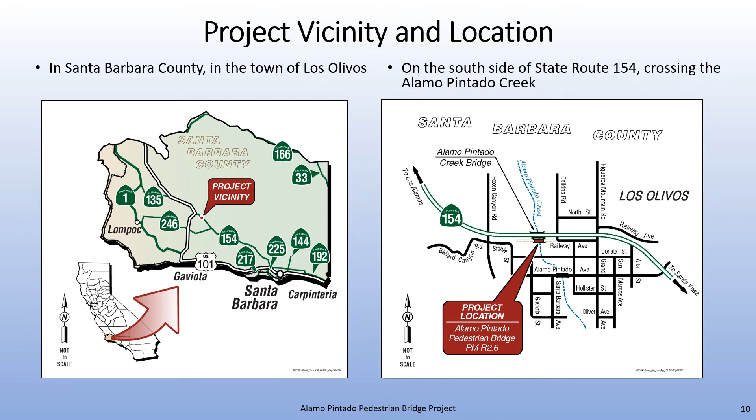The Alamo Pintado Creek Pedestrian Bridge was constructed in 1912. In 1971, a new bridge structure, Alamo Pintado Creek Bridge, was built 40 feet upstream from the original structure. At that time, local citizens contacted the state to leave the 1912 structure in place so it could be used as a pedestrian and equestrian trail bridge. Concrete footing encasements were built around the pile caps of the existing structure.

However, these encasements have eventually become exposed and undermined over time. Scouring of the pile and pier foundation has caused settlement of the bridge deck. A bridge inspection report in 2011 determined the abandoned bridge is no longer stable with respect to gravity load. The bridge is sinking slowly at the supports. In the inspection report, recommendations were made to either retrofit the bridge or remove the bridge.

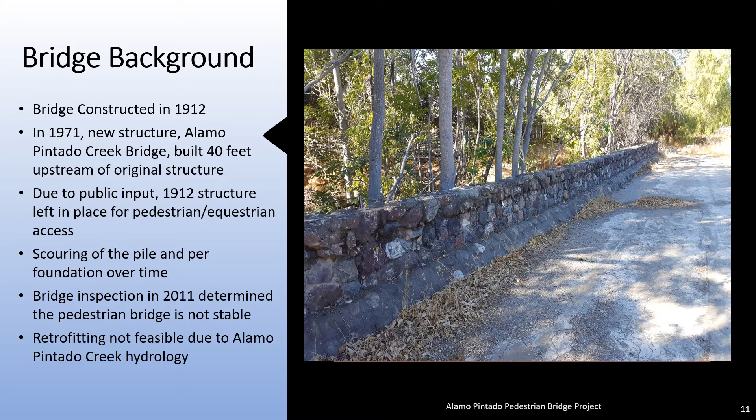Since these recommendations were made, it has been determined that this area of Alamo Pintado Creek is designated as a floodway, and the channel capacity cannot be reduced. Retrofitting is not feasible since the substructure would require constructing foundation elements within the channel, which would affect the hydraulic capacity of the creek. The purpose of this project is to reduce the risk to users from a bridge failure.

The project is needed because there is critical scouring of the pile and pier foundation of the bridge. The bridge structure is no longer stable with respect to gravity loads. Creek channel degradation has resulted in heavily exposed bridge piles, causing the bridge to sink at its supports.

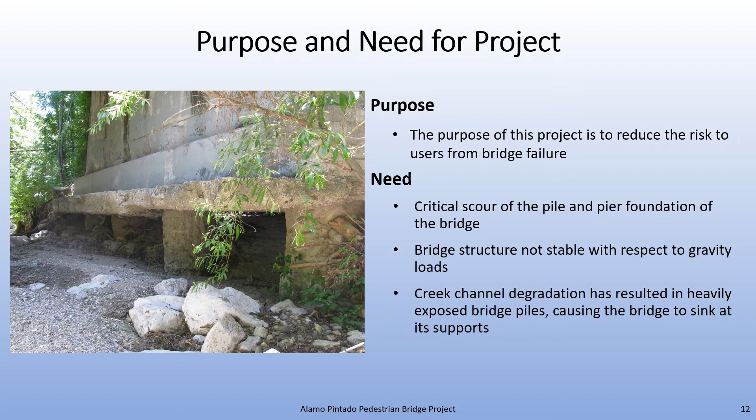Caltrans proposes to remove the Alamo Pintado Creek pedestrian bridge. The project would also remove a retaining wall and install rock slope protection, known as RSP, to protect the channel banks from erosion. The bridge superstructure would be removed from above the creek, while the piers and foundation portion would be removed from below. Minor grading and embankment restoration would also be necessary within the proposed construction easement.

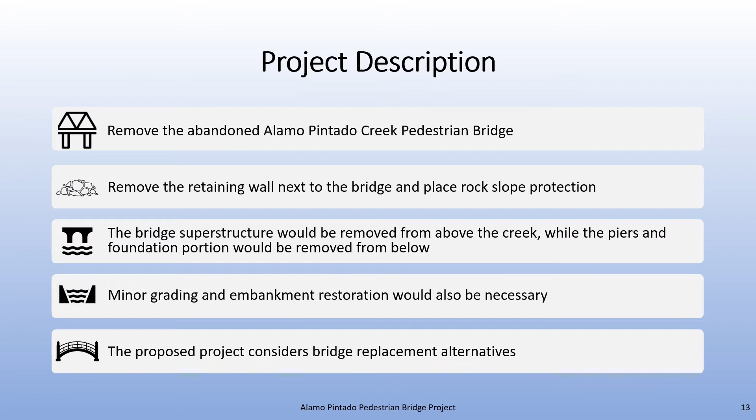The proposed project also considers bridge replacement alternatives.

There are 3 alternatives under consideration. The build alternatives include Alternative 1, bridge replacement, and Alternative 2, bridge removal. Alternative 3 is the no-build alternative.

An alternative that was considered but rejected includes retrofitting the bridge. Due to a request from the community to retrofit the bridge, the project development team asked the Structures Unit to review such an alternative. Caltrans Structures engineers concluded that the bridge is not retrofittable.

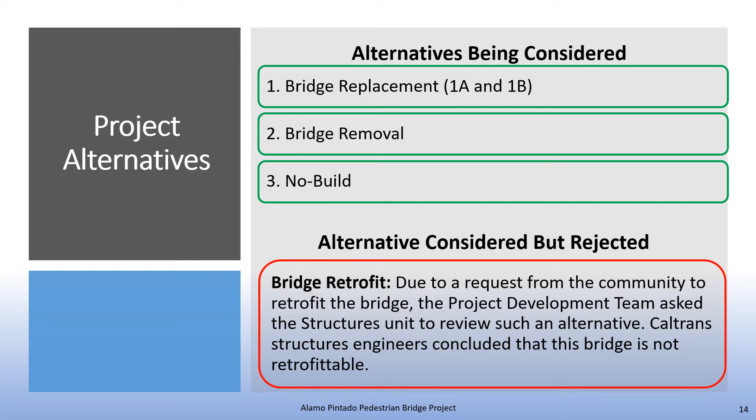Alternative 1 would remove and replace the existing bridge. Bridge replacement alternatives include Alternatives 1A and 1B. Alternative 1A proposes a single-span concrete bridge about 115 feet long, 12 feet wide, and 4 feet deep.

3 design options are being considered for the bridge railing and include architecturally treated concrete curbs, different sizes of steel beam railings, and one of the options includes architecturally treated concrete posts.

Alternative 1B would replace the existing bridge with a pre-engineered steel bowstring truss bridge with steel posts and a steel beam railing. The proposed bridge would be about 115 feet long, 10 feet wide, and about 9 inches deep. An example of a pre-engineered steel bowstring truss bridge is shown on this slide.

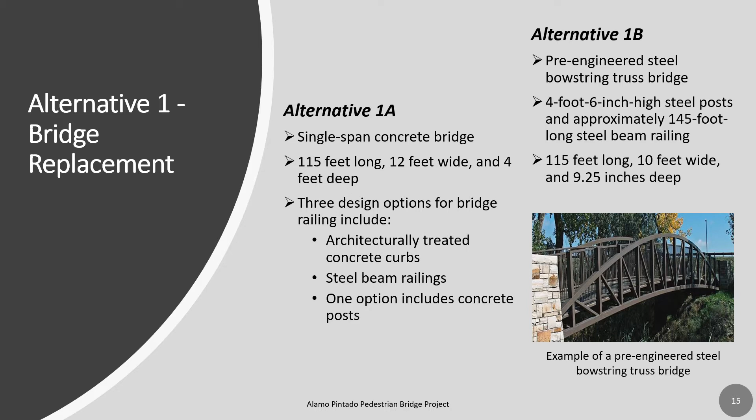Alternative 2 would remove the bridge as outlined in the project description but would not replace it. Alternative 3 is the no-build alternative and would leave the bridge as it is. This would allow the structure to continue to deteriorate and would not address the deficiencies of the bridge.

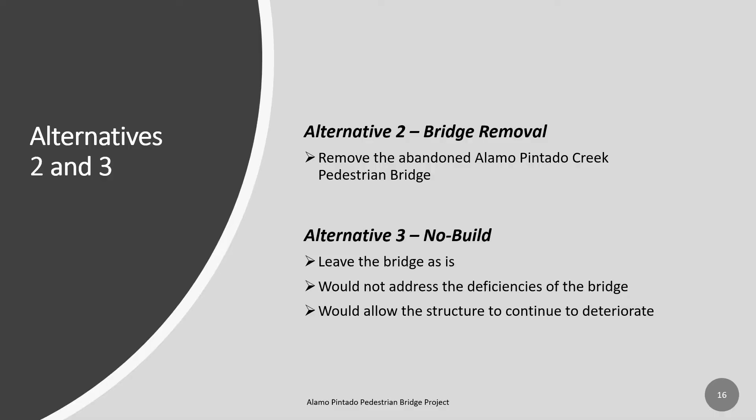Project costs include support, construction, and right-of-way costs. The total project cost is estimated at about $3.8 million. Construction would take about 6 months to complete, beginning in April of 2023 and completed in October of 2023.

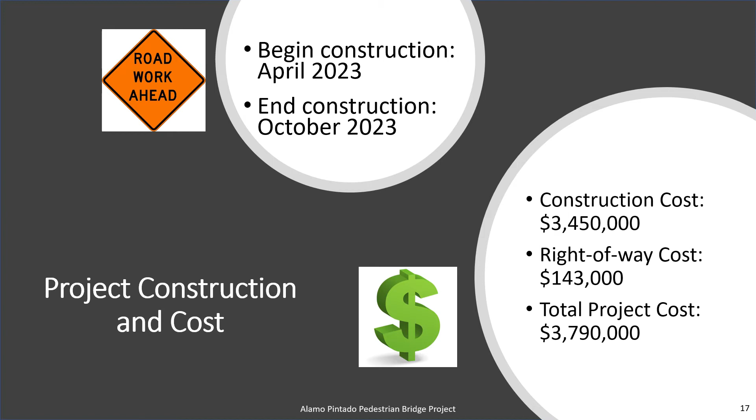This project will be funded from the Bridge Rehabilitation and Replacement Program in the 2020 State Highway Operational and Protection Program.

I will now describe the environmental framework and summarize the environmental studies.

This project is subject to state and federal environmental review requirements. Project documentation has been prepared in compliance with both the National Environmental Policy Act, known as NEPA, and the California Environmental Quality Act, known as CEQA. Caltrans is the lead agency under both CEQA and NEPA.

In compliance with CEQA, Caltrans has prepared an initial study for this project. The initial study describes why the project is being proposed, what alternatives are under consideration, how the existing environment could be affected by the project, potential impacts of alternatives considered, and the proposed avoidance, minimization, and mitigation measures.

Pending public review, Caltrans intends to adopt a mitigated negative declaration, meaning that the proposed project would not have a significant effect on the environment with the proposed mitigation incorporated. This does not mean that Caltrans' decision on the project is final. This proposed mitigated negative declaration is subject to changes based on comments received from interested agencies and the public.

Under NEPA, Caltrans performs federal responsibilities for environmental decisions and approvals that are funded by the Federal Highway Administration through a Memorandum of Understanding between the two agencies. Caltrans intends to prepare environmental documentation supporting a categorical exclusion based on the results of the technical studies conducted for the project, which document there would be no significant effect on the environment as defined by NEPA.

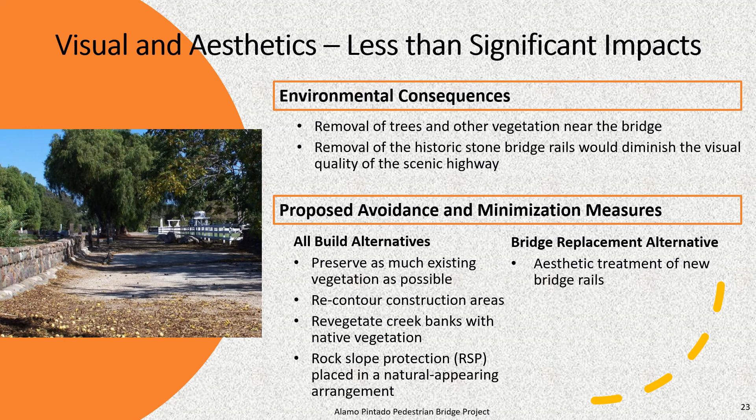For alternative 1, aesthetic treatment shall be included in the proposed replacement bridge rail design. The appearance shall be consistent with the local community aesthetic values and the State Scenic Highway State Route 154 corridor.

The proposed project would remove 7 Southern California black walnut trees due to their proximity to the bridge. The removal would not only affect individual Southern California black walnut trees, but also the wildlife species that may use these trees as foraging, nesting, and/or roosting habitat. Although none of the regional animal species of concern were seen during biological surveys, their presence is inferred due to the presence of suitable habitat. In addition, bat droppings, called guano, were found right below night roosting locations.

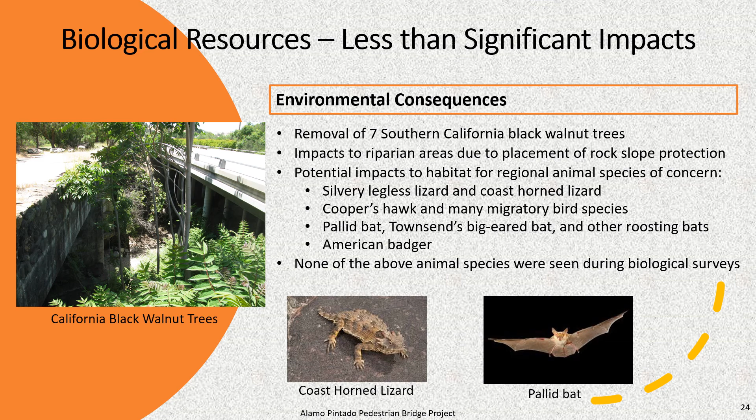The initial study provides detailed information on all the proposed avoidance and minimization measures. Some of these measures include placement of an environmentally sensitive area fencing to protect sensitive resources, biological monitoring before and during construction, work windows and restrictions, and environmental education and training for workers.

After construction, stream contours would be restored as close as possible to the original condition, and measures will be implemented to prevent the spread of invasive species. Replacement plantings would be achieved using a 3-to-1 ratio for each native tree removed. On-site replacement plantings will include the Southern California black walnut, western sycamore, and the arroyo willow.

Under alternatives 1 and 2, the demolition of the Alamo Pintado Creek Pedestrian Bridge would result in a finding of direct adverse effect to a historic resource that is eligible for listing in the National Register of Historic Places.

Proposed avoidance, minimization, and mitigation measures include preparing a public interpretive document, such as a pamphlet or booklet, on the history of transportation and historical context of the bridge. It would be distributed in the local area. Historic American engineering record professional photographs and written documentation of the bridge will be prepared before the bridge is demolished.

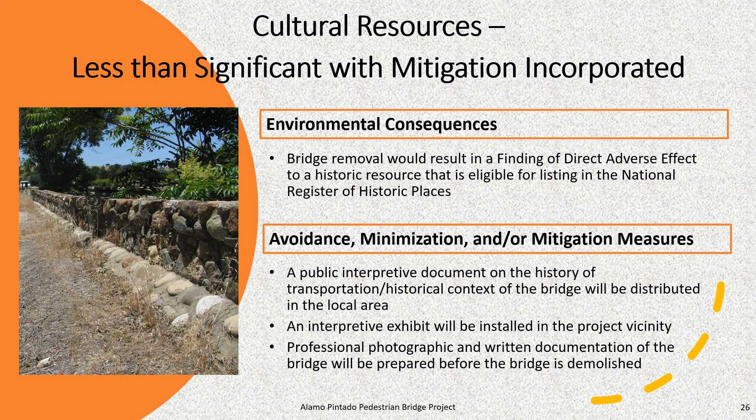In addition, an interpretive exhibit will be installed in an area where it can provide a public benefit. The information in the exhibit will be on the history of the transportation and historical context of the local area, and it will be installed in the project vicinity.

Based on the studies thus far, the environmental investigations indicate that this project would not result in significant impacts on the quality of the human or natural environment, with the proposed avoidance, minimization, and mitigation measures incorporated.

The public comment period ends October 9th of 2020. Following the public comment period, all documentation of this public hearing will be reviewed by Caltrans for final environmental determination and design approval. If there are no major issues arising from this hearing that cannot be addressed in a reasonable time frame, final environmental determination and project approval is expected in January of 2021.

The project has an intended ready-to-list for bidding date of June of 2022, and fund allocation is anticipated in August of 2022. Construction would begin in April of 2023, and it would be completed in October of 2023.

Revisions or updates may be made to the environmental document in response to public input and comments received during the public comment period, or to address the needs of the state and federal agencies. After all necessary revisions are provided, the environmental document will be finalized. Caltrans intends to adopt a mitigated negative declaration for the project.